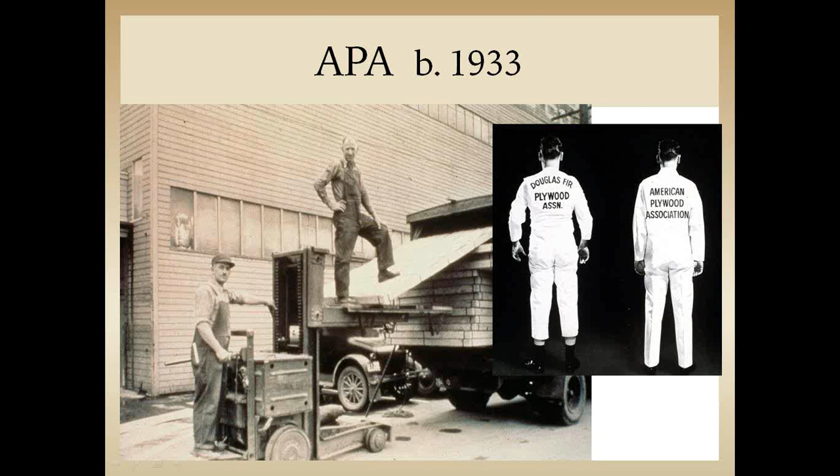The name was changed again in the early 90s to APA, the Engineered Wood Association, to more accurately reflect the new product mix and a new geographic range, both the U.S. and Canada. Products include plywood, oriented strand board, wood I-joist, glulam timber, structural composite lumber, and many associated products.

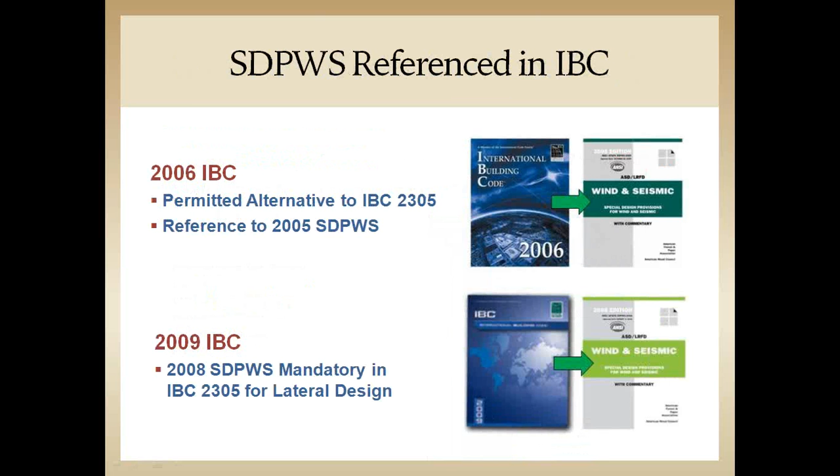The special design provisions was referenced in the 2006 IBC but became mandatory in the 2009 IBC. So some of the changes that were brought about in the 2008 include the ability to design for combined shear and uplift using wood structural panels, provisions for determining capacity of unblocked shear walls, two-sided shear walls. Also, a shear capacity adjustment factor equation was added to the perforated shear wall method, increased strength limit for perforated shear walls, and changes to the high-load diaphragm

accommodation. So, the Wood Frame Construction Manual is another publication by AWC and is a handy reference for both prescriptive and engineering solutions to common design scenarios that are encountered in wood frame construction. Supplemental to the Wood Frame Construction Manual are the guides to wood frame construction in high wind areas. There are separate documents shown here that address wind design requirements in 90, 100, 110, 120, and 130 mile per hour exposure B wind zones. For other wind speeds and exposures, you can simply refer to the 2012 Wood Frame Construction Manual.

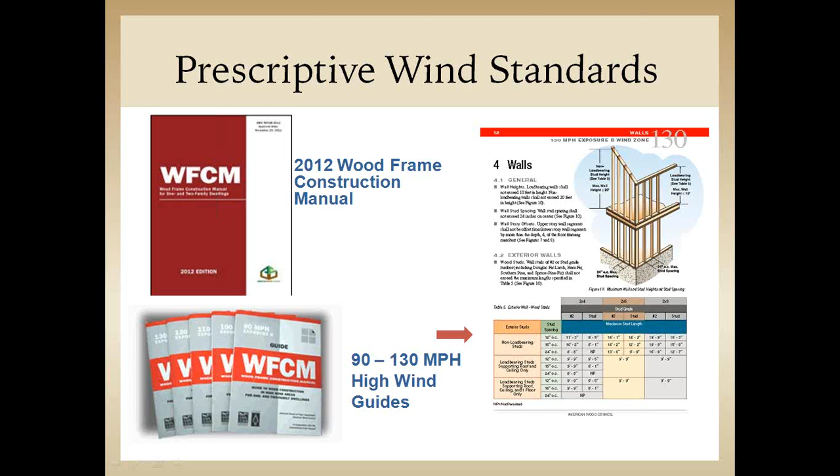But these separate guides are based on the provisions contained in the Wood Frame Construction Manual and are the reference document for high wind wood frame construction in the IRC. Use of the high wind provisions in these guides will result in design solutions that are prescriptively meeting the requirements of the Wood Frame Construction Manual and the IRC.

The prescriptive design of buildings in high wind regions is also addressed in ICC 600, formerly SSTD 10, and it gives a cookbook approach to design of smaller, more simply shaped buildings. An important distinction should be made between prescriptive construction and engineered design, where prescriptive bracing is called for in the International Residential Code with limits to the building size and wind speeds. But these are braced wall panels and not to be confused with shear walls.

Without hold downs, this is the main difference between brace wall panels and shear walls: brace wall panels do not require the use of hold downs. So for prescriptive design, wind speeds over 100 miles an hour, refer to the Wood Frame Construction Manual or the

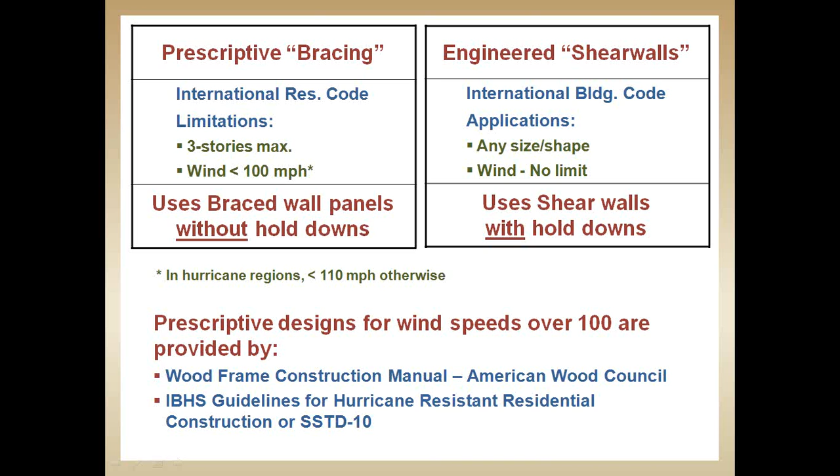ICC 600 document. Many contemporary home designs offer less opportunities for traditional wall bracing due to an abundance of windows and doors, especially in the front and rear elevations.

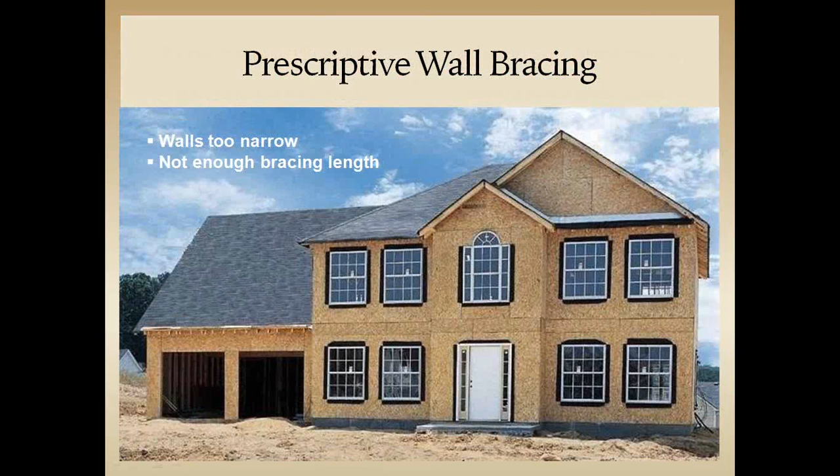In addition to bracing methods given in the residential code, an APA simplified bracing method presented by System Report 102 gives more versatile solutions by offering the ability to use thicker panels at a tighter nailing schedule above the code minimums. What this does is allow for narrower bracing segments to be used. It gives more flexibility in accommodating the greater amounts of openings as found in contemporary home designs. As with all APA publications, SR 102 is free for download at apawood.org.

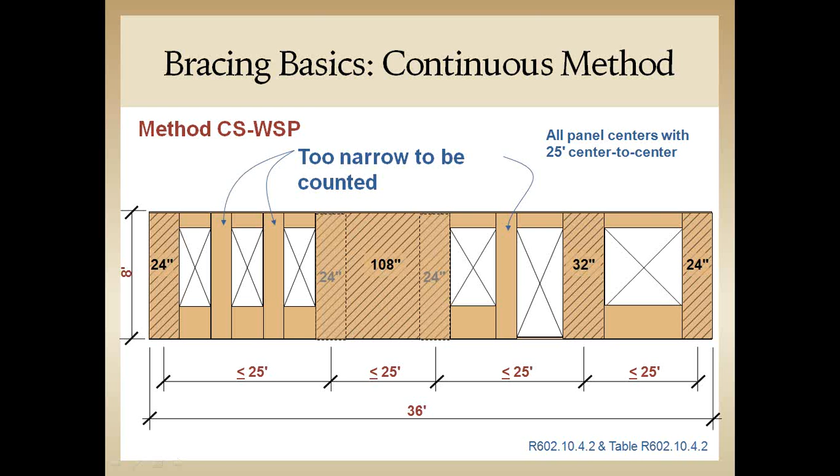The special report SR 102 takes into account an added effectiveness of continuous wall sheathing as represented in the IRC wall bracing method CSWSP, or continuously sheathed wood structural panel, and thereby gives partial credit for walls that are otherwise too narrow to be counted as a bracing unit.

The recent publication by APA, Building for High Wind Resistance in Light-Frame Wood Construction, offers a low-cost system that can be applied to IRC-compliant construction and prescriptively reinforces minimum IRC construction in the weak links that have been identified in some of the high wind events. These have been common in standard wood frame buildings. So it's a 9-point checklist of time-tested details that seek to better provide wind resistance by reinforcing the common vulnerabilities

in prescriptively built homes. Remember that the IRC does not provide a design to resist a specific load, but is a cookbook measure. But by applying these high wind resistant details, at a low cost, as little as $600 on a 2,100 square foot home was estimated as the cost of applying these options to a single-story ranch average size home. It also offers a benchmark for which prescriptive buildings can be constructed to a Code Plus level or above the code minimums, whereby resistance to wind can be dramatically increased for really a small expense. This will be an attractive option for builders who wish to differentiate their homes as safer and more damage resistant than those constructed to code minimums.

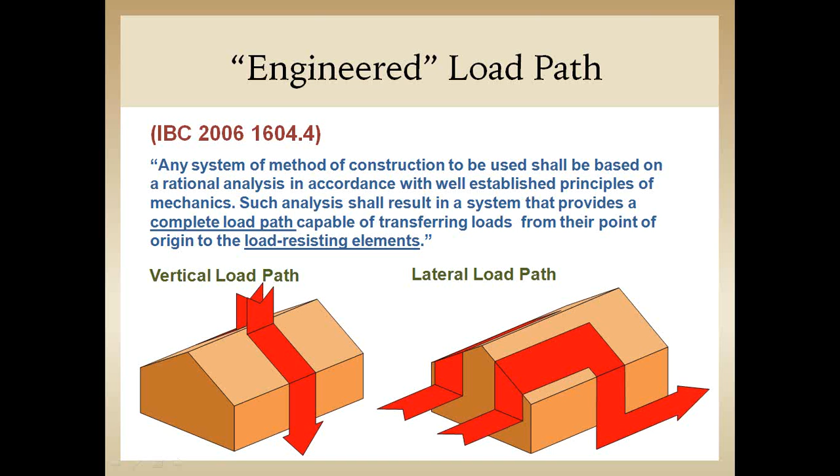In contrast, engineered buildings as defined by the International Building Code must include a rational analysis to provide a complete load path for both vertical and lateral forces. In wood construction, the uplift and lateral load paths are less obvious, so empirical methods, or those based on testing, have been developed to allow a departure from a more rational approach. However, the skin or exterior wall sheathing serves a valuable structural role and provides continuity in the uplift and

lateral load path system. So here wind forces are simply determined by multiplying the wind pressure, both positive and negative, by the area of the building over which the wind pressure acts. Our lateral load systems for resisting the loads include rectangular plates, also known as shear walls, and floor and roof diaphragms that give the structure the ability to resist racking forces and to carry the forces to the foundation and eventually to the ground. Shear walls and diaphragms are simply constructed of framing members sheathed with wood structural panels with enough nails so that the parallel framing represented by the wall and roof assemblies remain rectangular.

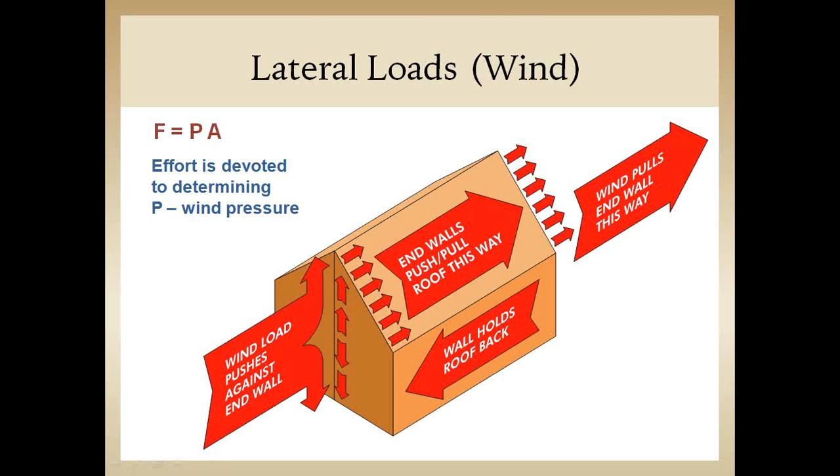Another important aspect to building performance is that the walls and roof elements are connected together and to the foundation adequately so that they do not become separated from each other or the foundation in an extreme load event. Resistance to both positive and negative pressure is required for adequate building performance. Negative pressure may result in uplift as it applies to this roof. Positive pressure exerted on the windward wall here may also be exerted on the interior of the building should a breach in the building envelope occur in the area of positive pressure.

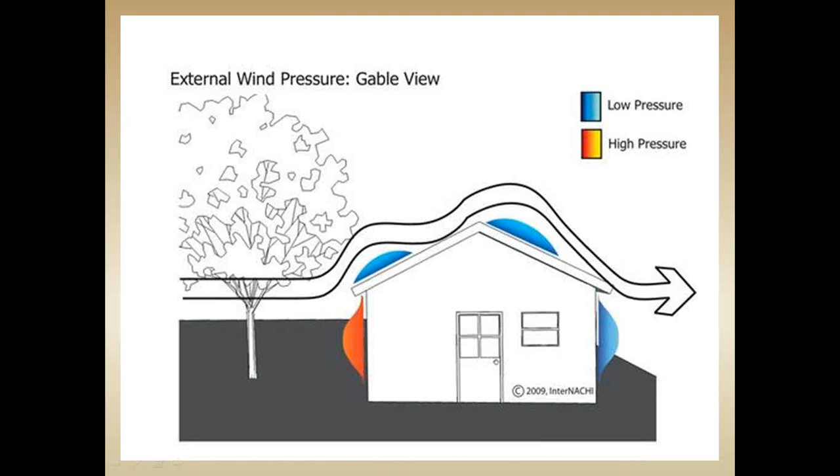This is often due to flying debris and loss of windows and doors from flying debris and wind pressure. And when a breach occurs, the interior of the building can suddenly become pressurized, adding to the uplift and lateral forces already being exerted on the exterior surface of the building.

Seismic or earthquake forces are exerted on the building due to acceleration of the ground. However, the building doesn't know a lot of difference, as far as it's the same assembly that resists the seismic force as does the wind. The difference is that the force is generated from the ground acceleration, whereby the building is left to catch up with the foundation movement, accelerating and decelerating in 3 directions simultaneously. Lateral and uplift forces are determined by the product of the building mass times the ground acceleration. So the greater the mass of a building, the greater the lateral force for a given seismic acceleration.

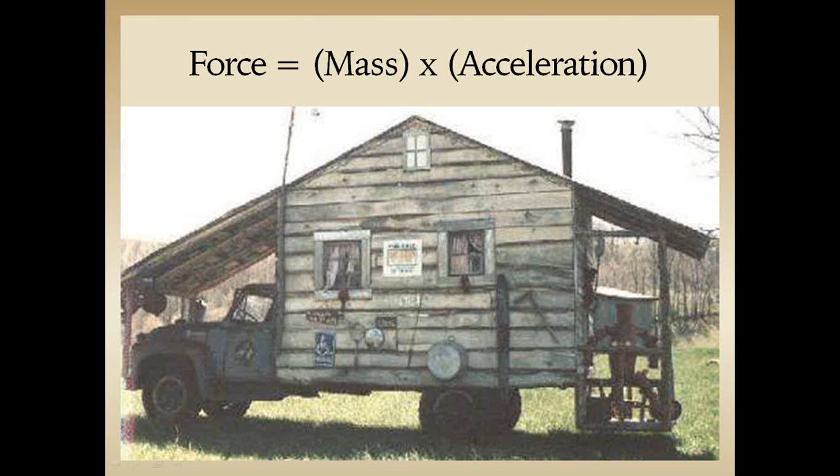Wood buildings are light and flexible, resulting in lower seismic forces to be resisted. Remember that the force is equal to the mass times the acceleration. So lower mass equals a lower force. And the redundancy in the system, which uses thousands of nailed connections within a building such as this, results in good performance because of the energy absorbing qualities and the stiffness in resisting the elements. So both energy dissipation, reduced lateral force and redundancy allow the wood systems common in North America to perform well if properly constructed.

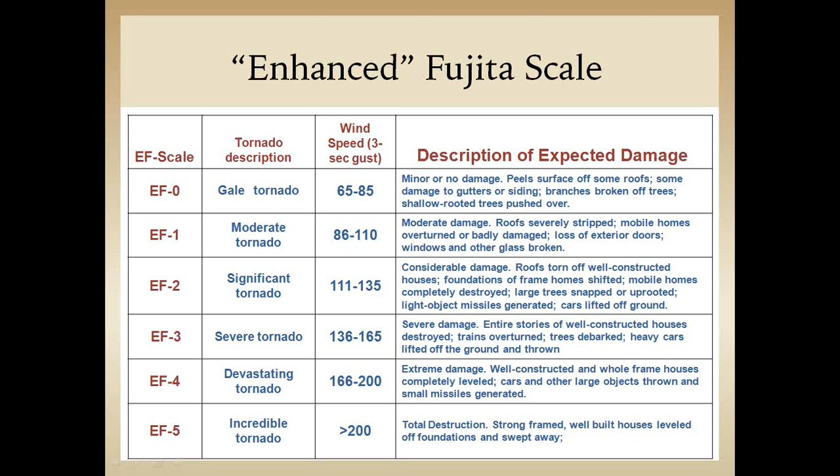This would be true if all tornadoes were rated EF5, or the 300 mile per hour plus variety. Here we see the Enhanced Fujita scale indicating a wide range of wind speeds associated with tornadoes, EF0 through EF5. Generally, these tornadoes are classified based on descriptions of the damage. So, you know, it's a judgment call many times by the observer as to which rating a tornado might be given.

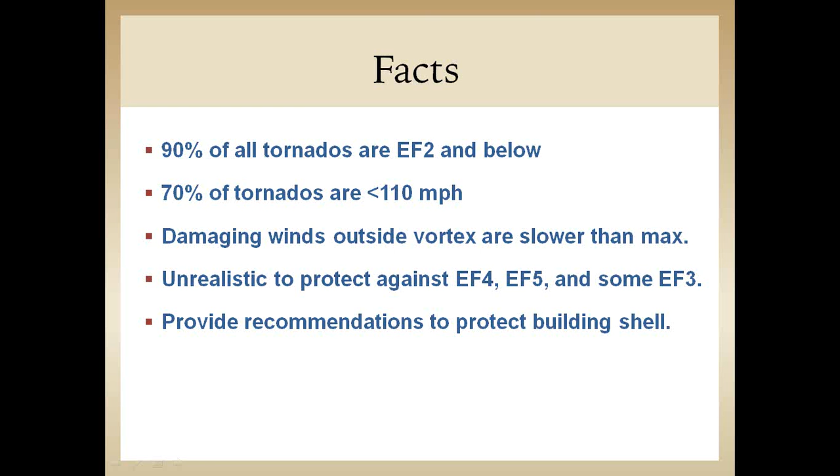So there are a few facts here that we should recognize: 90% of all tornadoes are EF2 and below. 70% are less than 110 miles per hour. And the damaging winds in a given tornado outside the vortex are many times slower than the maximum rating of the tornado. It's unrealistic to protect against EF3, 4, and 5 tornadoes, but we can provide recommendations to protect the building shell in the lower rated wind speeds, including almost 95% of all tornadoes.

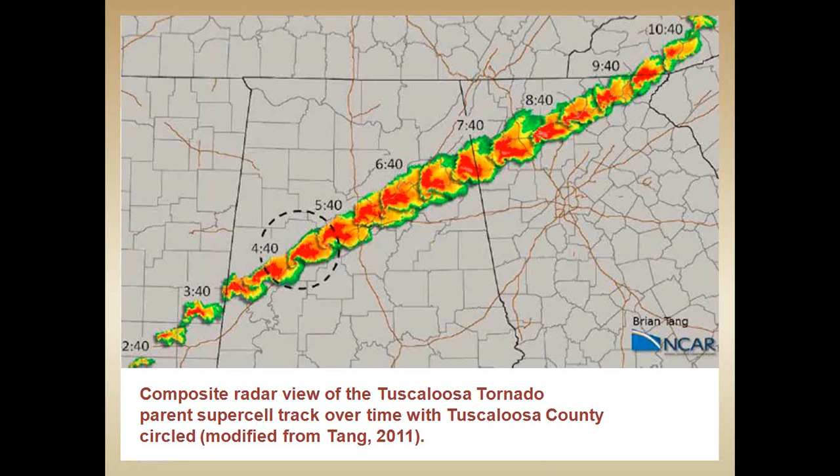This image reflects a variation in wind speed along the path of the tornado affecting Tuscaloosa, Alabama in the super outbreak of 2011. A team of engineers and scientists closely observed damage within the circled area of the tornado path as it traveled close to the University of Alabama. And you can see within the circled study area, a detailed study indicated a variation in intensity from EF0 through EF4 within this area. As you can see, within the damage area, more of the area can be attributed to the lighter EF0 and EF1 winds than the more extreme events located sporadically along the vortex.

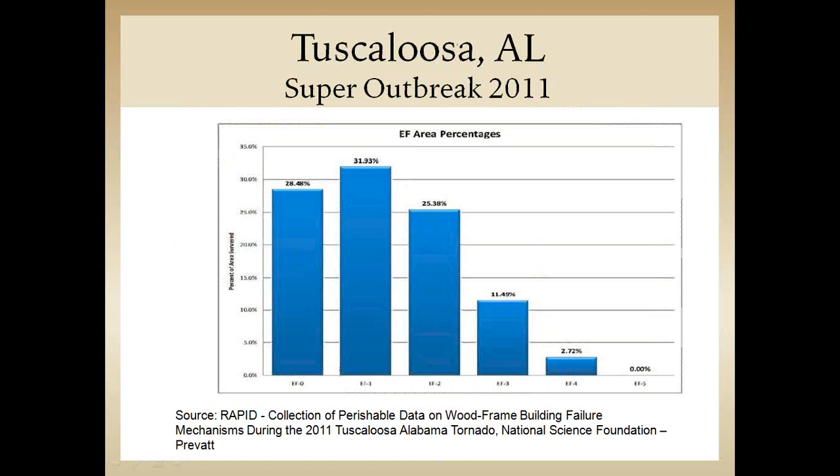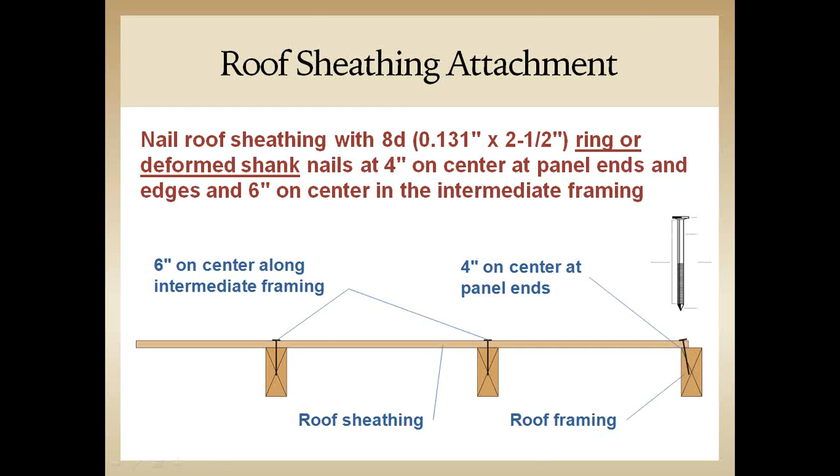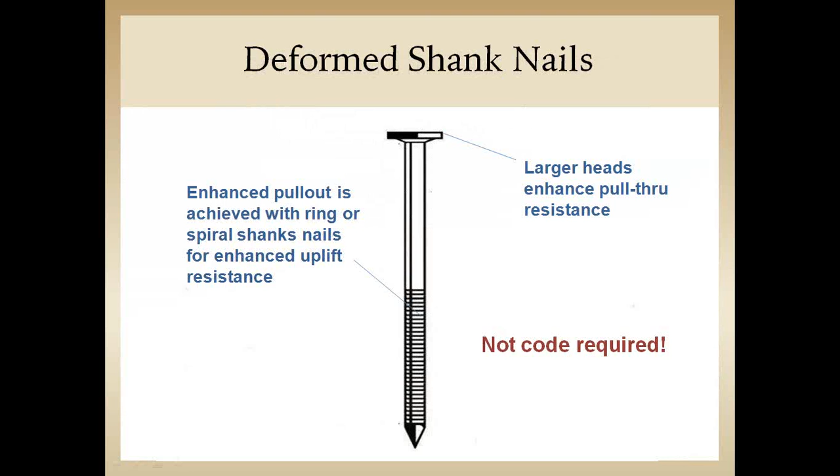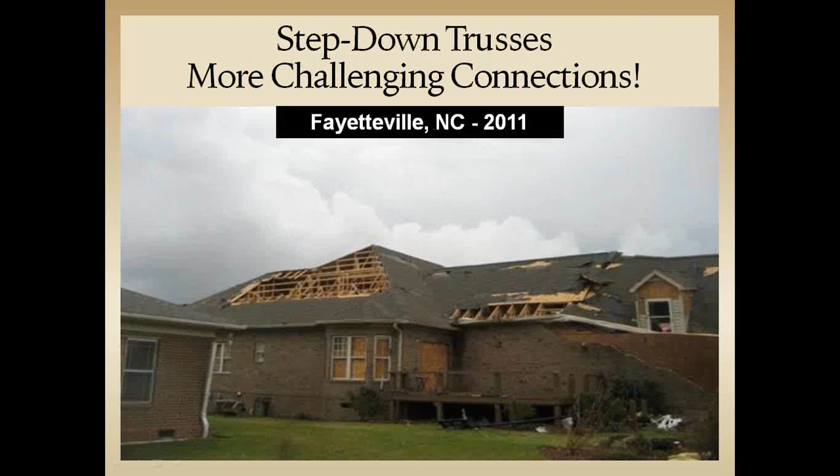Another real-world challenge is when step-down trusses are used in hip roofs. In this case, the roof sheathing is sloped, but the nailing surface of the truss top chord is not. This invites poor connection between the two. A better detail for framing this area is to use purlins on top of the step-down hip trusses so that the nailing surface is flush with the roof sheathing, and the direction of the roof sheathing does not need to change.

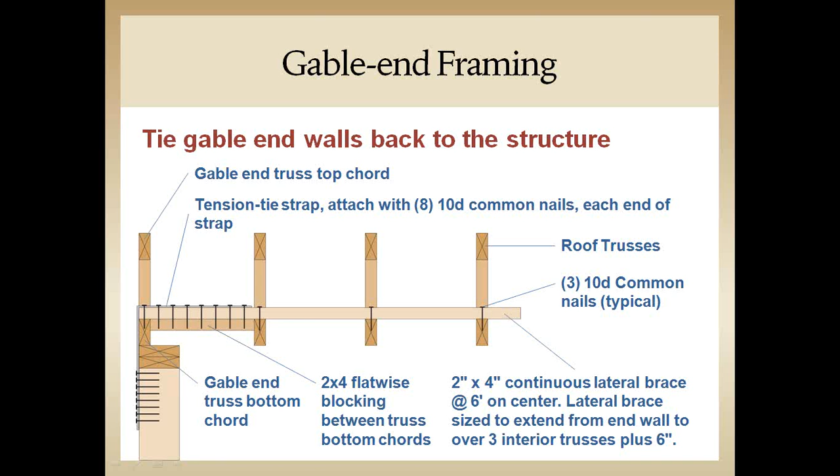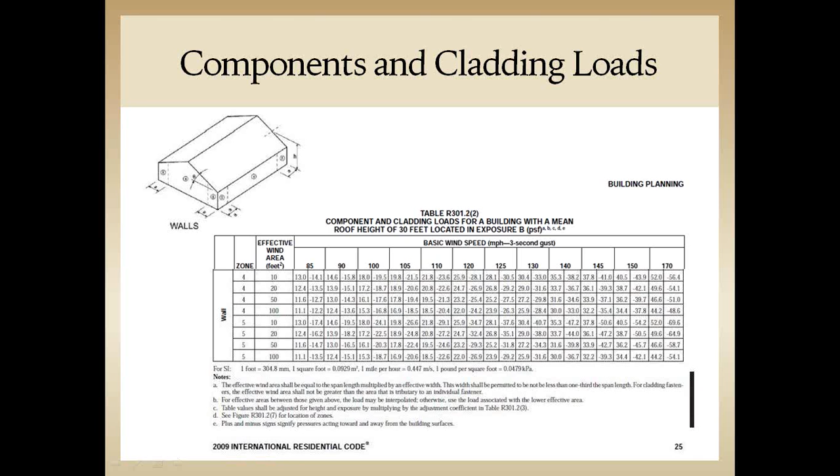strong tornado, EF3 approximately. Pressure requirements for wind acting on the exterior surface of a building are specified in the International Residential Code. These are localized pressures referred to as component and cladding loads that are meant to be resisted by the siding and wall sheathing in the home's exterior. These minimum pressure requirements apply to all residential buildings constructed according to the IRC. Specific component and cladding loads can be accommodated using APA's TT 105 Technical Topics Report, Requirements for Wall Coverings and Wind Pressure, available for download at the website.

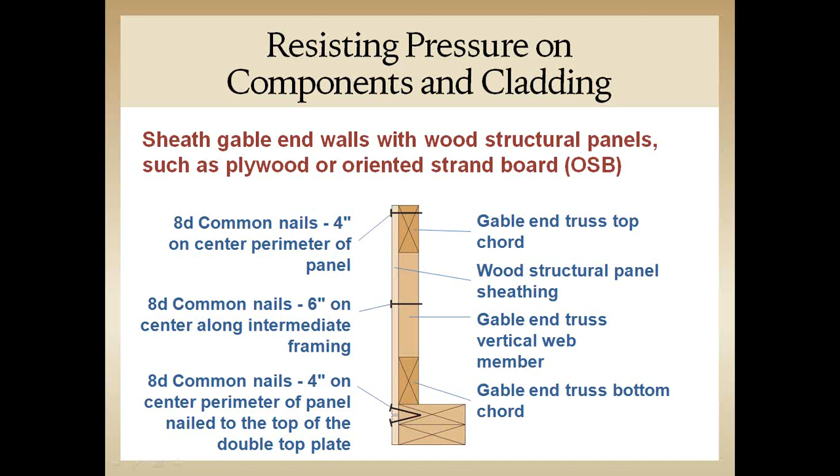Table 1 from this publication gives specific nailing required to resist the component and cladding loads in the IRC, but a more general approach represented in the high wind guide will be to use more nails for attachment of wall sheathing than is required by the code. This is especially important along the gable ends where no interior gypsum is present on the inside face of the wall to assist in resisting the wall pressure.

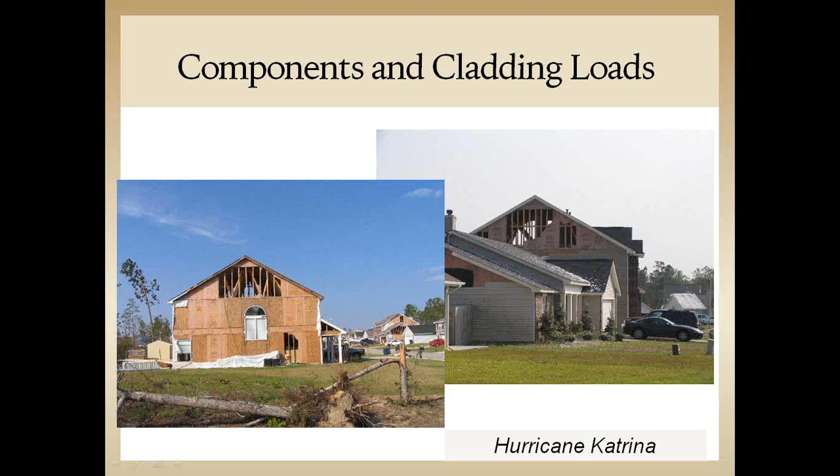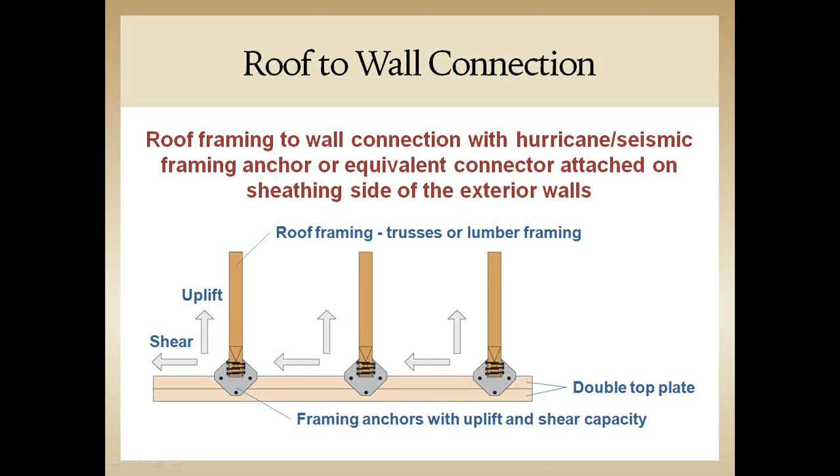Another useful piece of hardware are structural screws that can be added to enhance the roof-to-wall connection. These can be combined with metal connectors in cases where the connectors don't offer enough capacity, or used alone as an enhancement over code minimum toenailing.

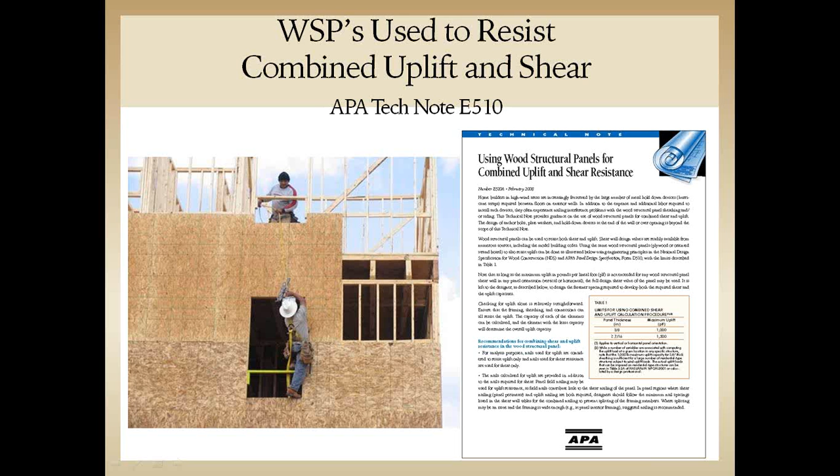As represented in APA Tech Note E510, this method for handling uplift loads across structural discontinuity is a very efficient method and can reduce cost and construction time as compared to the use of metal connectors across joints in the wall framing, such as you see here.

Many wall sheathing manufacturers are now making oversized panels, and these are longer than the standard 8-foot panels, still 4 feet wide, intended for wall applications where the panels extend from the sill plate to the upper level band joist. These are manufactured intentionally for 8, 9, and 10-foot walls, typically eliminating mid-height blocking, allowing easy inspection of the continuity of the load path. Studies of this taller wall sheathing indicate that less air infiltration results and a more direct uplift lateral load path is obviously a benefit here.

Of course, when there's only a small segment of wall between two openings, the use of metal connectors will still sometimes be needed. There may not be enough wall between the two openings to accommodate. There are two methods for using wood structural panels to provide uplift resistance.

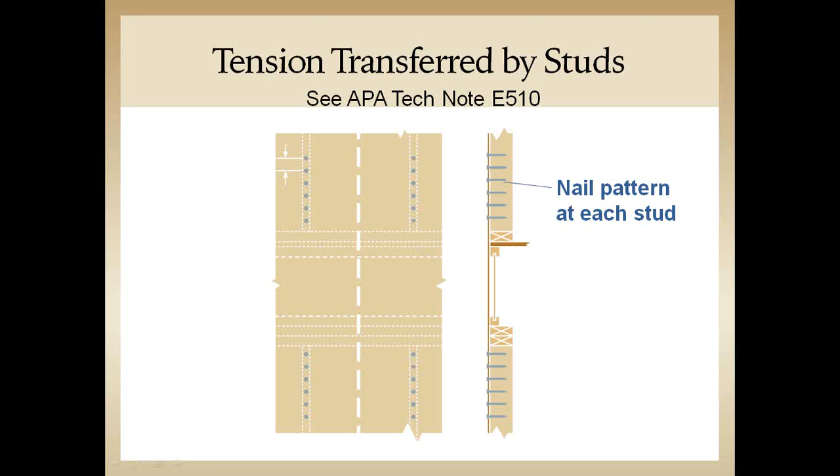The first involves the uplift tension being transferred by the studs where the horizontal joints are located away from the discontinuities of the framing. In this case, additional nails can be placed in the studs to accommodate the uplift at this location. This is usually easy to accomplish since additional nails can fit easily along the intermediate framing members, where most fastening schedules for shear wall attachment require only 12-inch on center fasteners at the interior or at the intermediate wall framing members.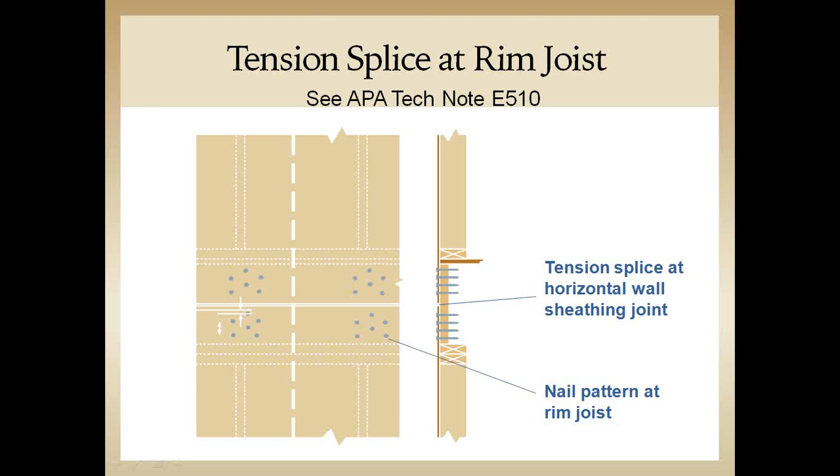The other method outlined in APA E510 allows the splice to occur at the rim board, where uplift fasteners are placed in the rim board at the splice. Of course, this requires that the rim board be designed for vertical force, which is perpendicular to the rim board length. It's not possible with rim board using lumber or other products without design capacities in the vertical or short dimension. However, APA plywood and OSB rim board, such as these used in conjunction with I-joist floor systems, are acceptable for this application due to their significant strength that's available perpendicular to the member length.

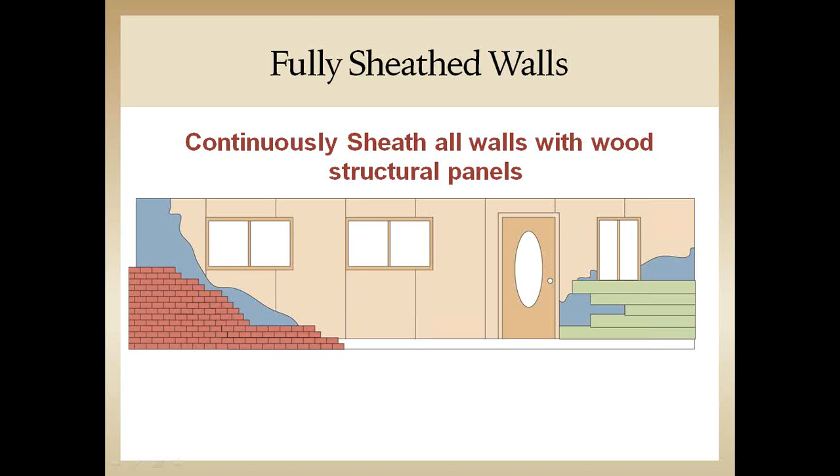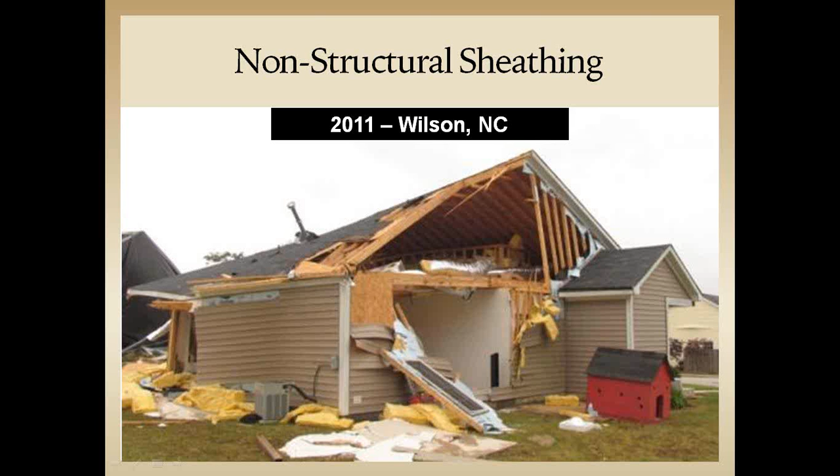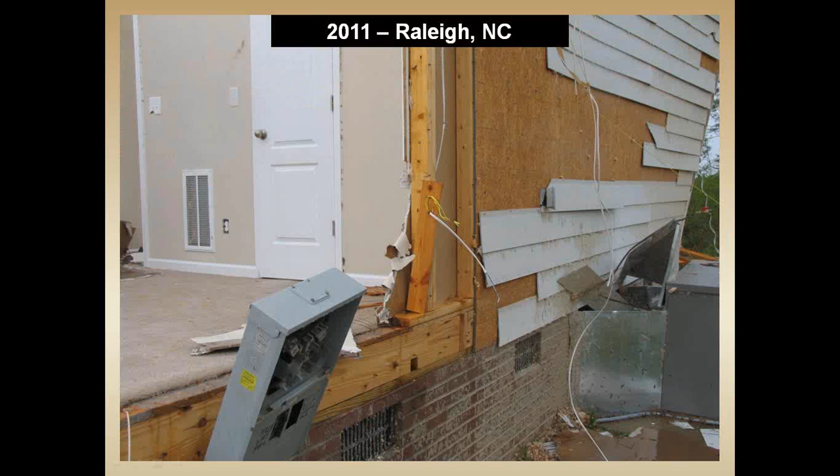Another important detail in the APA High Wind Guide shows the wall sheathing overlapped with the bottom plate or foundation sill plate, allowing direct nailed attachment to the foundation anchorage. In this example from Raleigh, North Carolina, all of the essential elements are in place, but the load path is not continuous due to poor nailing at the bottom of the exterior wall sheathing in the region of the foundation. We can see from this vantage point that the wall sheathing nails at the bottom were mainly located along the rim board instead of the sill plate, and there are too few nails.

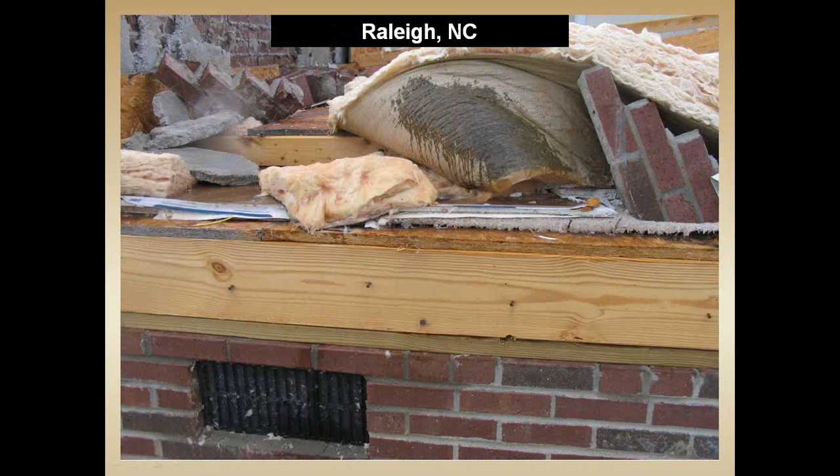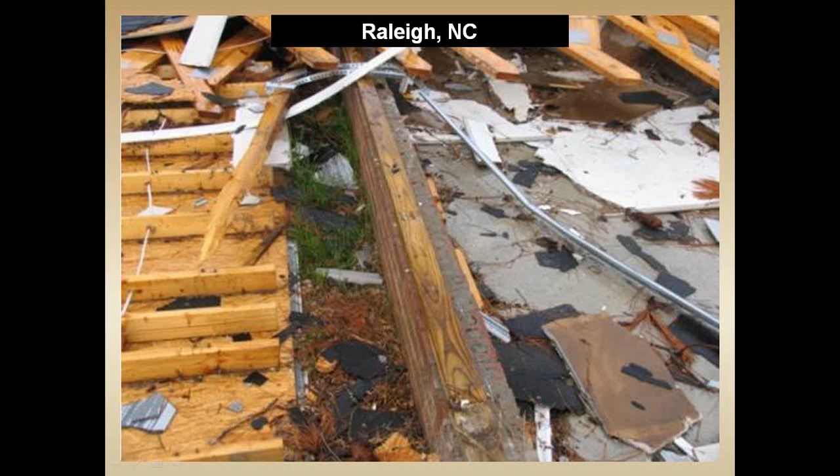Due to relatively large uplift forces at this location, APA recommends larger plate washers spaced 48 inches on center at this location as an upgrade to code minimum requirements in the IRC. Larger 3x3 plate washers, relatively inexpensive, are much more effective at holding down the bottom plate as compared to minimally sized round washers typical in this installation. Slotted plate washers are a common piece of hardware in seismic areas where they're required in high seismic prescriptive construction.

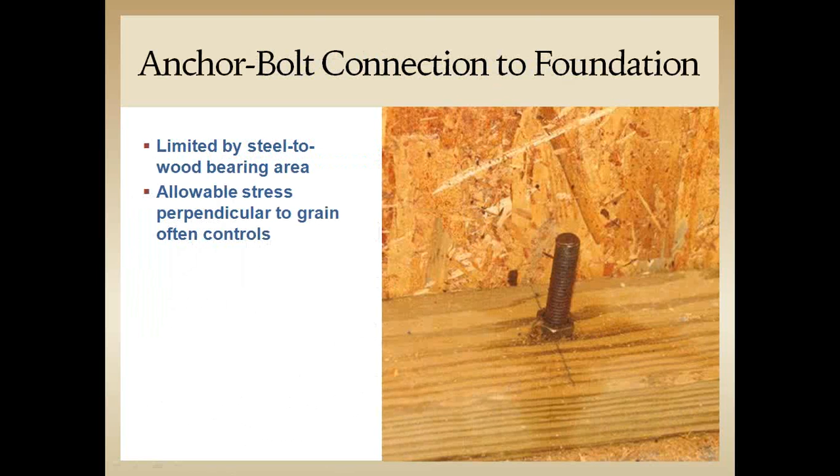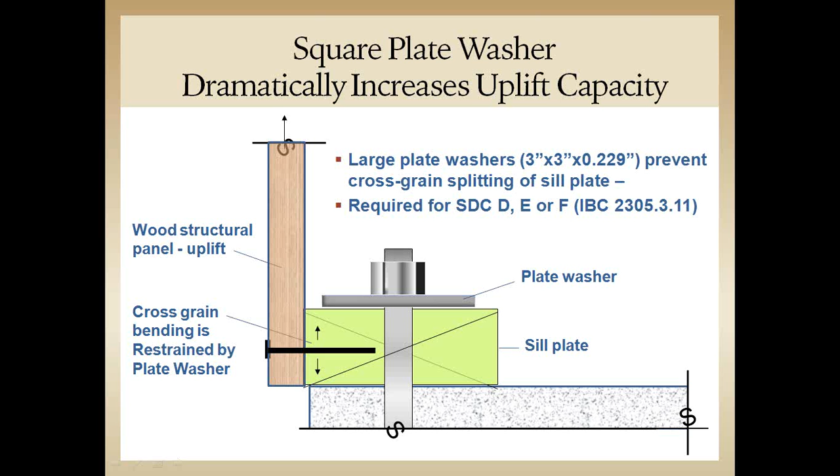In this image, we see that the larger plate washer increases the bearing area of the anchor bolt, but also, since the washer incorporates nails from the bottom of the wall sheathing, cross-grain bending in the bottom plate material, which is a potential failure mode, is also reduced. Testing in APA labs using larger plate washers at the bottom of walls subjected to uplift and shear simultaneously confirms this assertion.

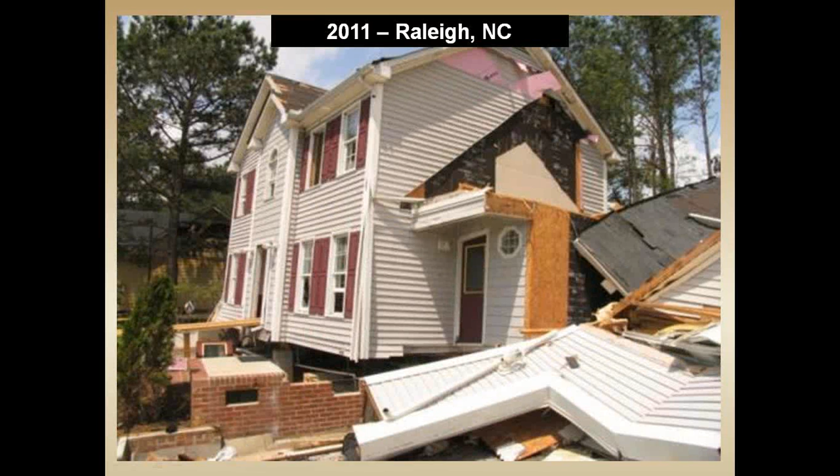This home was damaged in the May 2011 tornado due to poor foundation anchorage. And note the vegetation around the home, relatively intact, an indication that the wind forces were relatively light in this wind event. Despite the moderate winds, the home has shifted approximately 6 feet from the original location, and the garage is totally collapsed. Closer observation revealed no anchor bolts, and the sill plates in this case were poorly attached to the foundation, using steel pins that were easily pulled out of the foundation material.

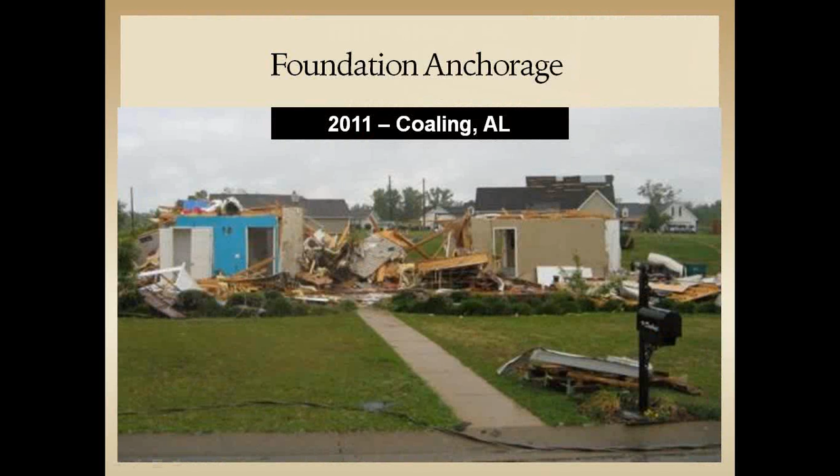Similar conditions were observed in newly constructed homes in harder hit areas of Alabama, as in this case, where exterior walls are largely absent from this home, constructed atop a slab-on-grade foundation. We can see that the bottom plate's absent from the perimeter of the slab, adjacent to the glued-down hardwood flooring. But upon closer examination, we see that an attempt was made to nail the plates to the perimeter of the slab, and the head of this fastener pulled through the bottom plate. In other cases, the nails were observed to be bent below the bottom plate and did not penetrate the concrete foundation.

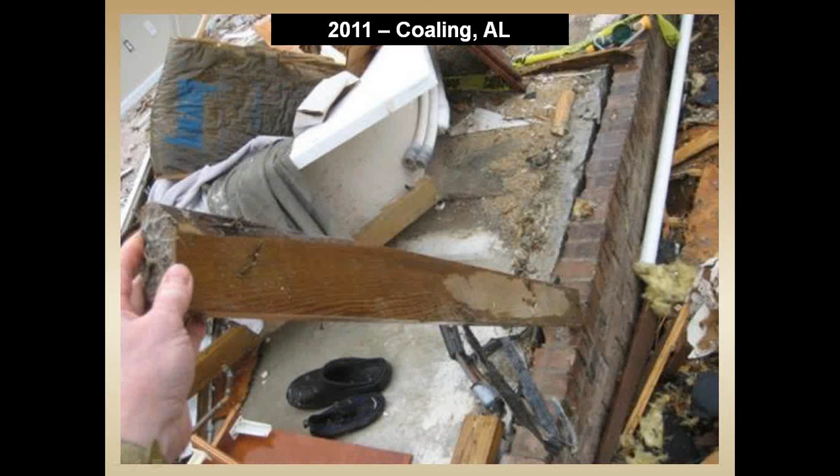This photo shows the result, taken in the same neighborhood, and shows a completely stripped home, all of the framing removed from the foundation by the wind. APA System Report SR101 gives more detailed information and design guidance for walls subjected to combined uplift and shear.

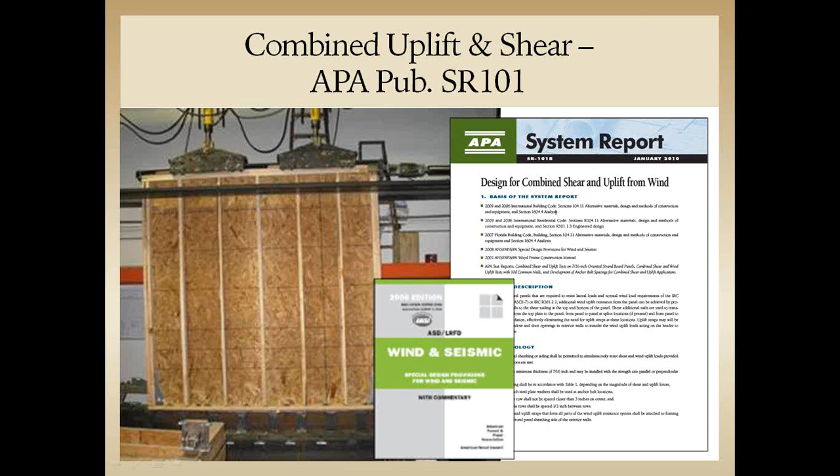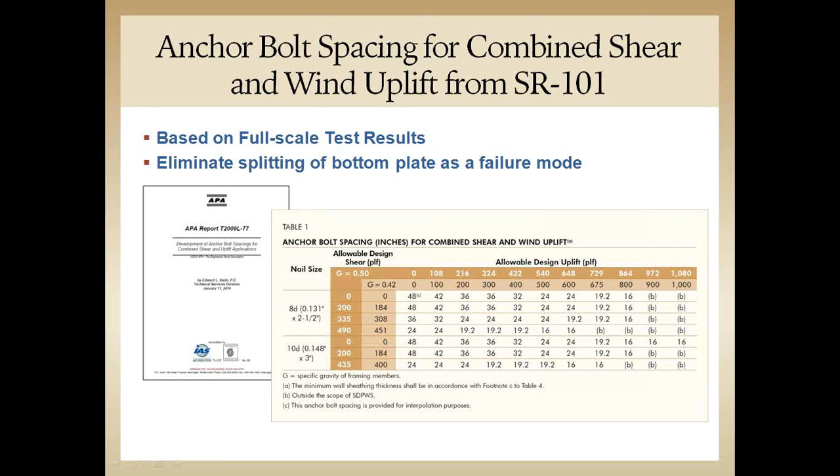This apparatus in the APA lab confirmed the values that are recommended for the spacing of foundation anchor bolts, as well as the methodology for using wall sheathing to resist simultaneous shear and uplift forces. The methodology is also reflected in the American Wood Council's special design provisions for wind and seismic. APA full-scale testing of uplift at the bottom plate connection confirmed these connections eliminate cross-grain bending or splitting of the bottom plate, as well as confirming the allowable uplift capacities given in Table 1 of SR101. This test report is available for your review at apawood.org.

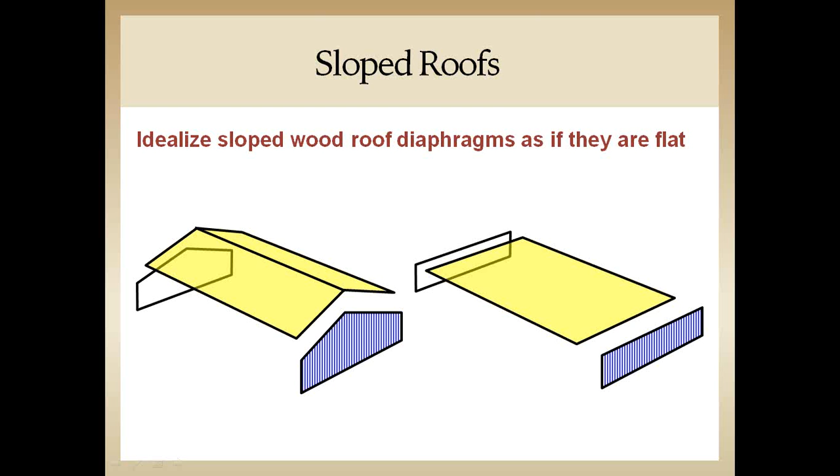This type of analysis resembles that of a simple span beam, where the beam would be located from top to bottom, simply spanning between the resisting walls. The bottom of this deep beam is subjected to tension forces just like a normal beam, which is normally resolved by tension splices in the top plate of the leeward wall. Shear within this beam analogy is assumed to be carried in the web and is designed through selection of adequate fastening in the roof sheathing to the framing to resist these racking forces. In the case of sloped roofs, the designer can conservatively assume that the roof is flat for analysis purposes. Analyzing it as a flat roof, even if it is sloped, will result in a conservative design.

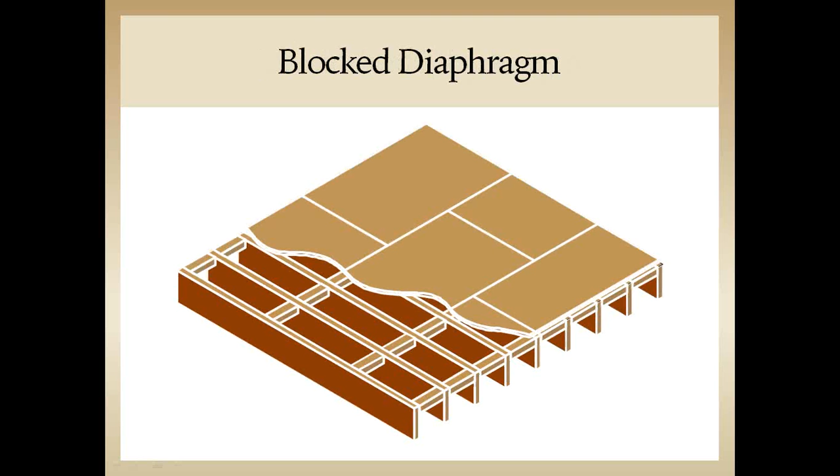Shear walls are normally assumed to be blocked, but the 2008 special design provisions for wind and seismic for the first time gives designers an adjustment factor for use in unblocked shear walls. This pertains to shear capacity adjustments for walls up to 16 feet in height based on cyclic testing of assemblies with as small as a 2-to-1 aspect ratio. Designers have two choices for horizontal diaphragm analysis, the flexible or rigid. The designer will normally have either method from which to choose, and depending on the building configuration, these two idealized assumptions offer differing but adequate results.

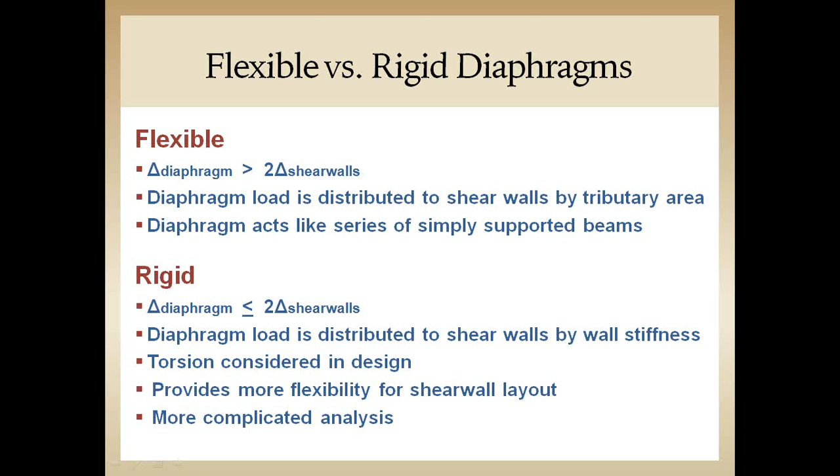So for flexible diaphragms, it's considered a scenario where the deflection of the diaphragm is greater than twice that of the shear walls. In this case, the load is distributed to the shear walls by a tributary area. The diaphragm acts like a series of simply supported beams. With the rigid analysis, where the deflection of the diaphragm is less than twice that of the shear wall, the diaphragm load is distributed to the shear walls by the wall stiffness, where a torsion can be incorporated in the design. This gives more flexibility for shear wall layout in many cases, but it offers a more complicated analysis.

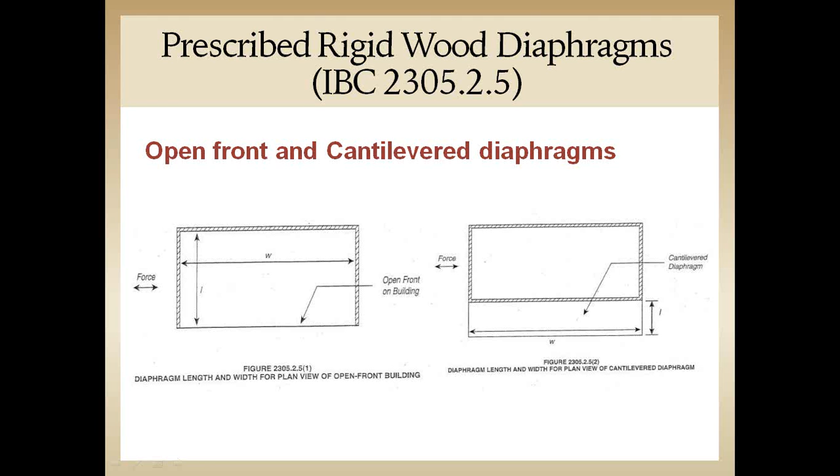The only case where the code is clear on which method should be used is where there's cantilever diaphragms or open-ended buildings, where rigid analysis is required to take into account the eccentricity between the load and resistance to load. So let's look at some examples. Let's assume this is our building layout with two exterior resisting walls, one interior.

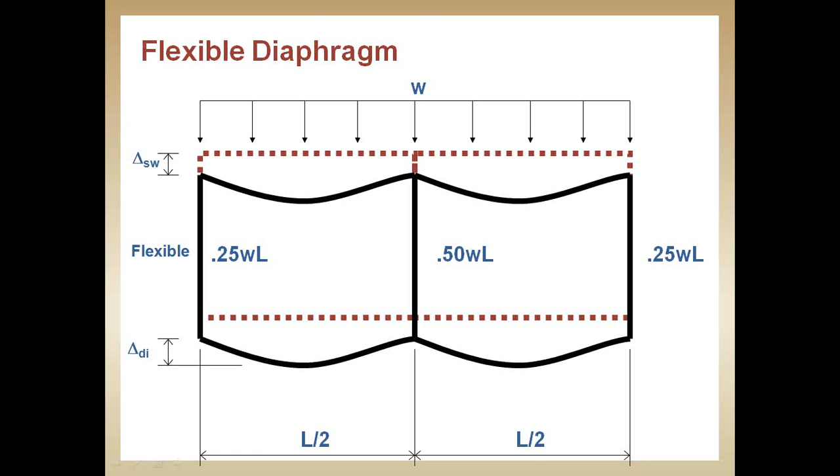With a flexible analysis, the load is distributed according to the tributary area, and so the distribution is half the load to the middle wall and a quarter of the load to the exterior walls, compared to a rigid analysis where the load is distributed according to the stiffness of the resisting elements or shear walls. And so in this case, all the walls have the same stiffness and carry a third of the load.

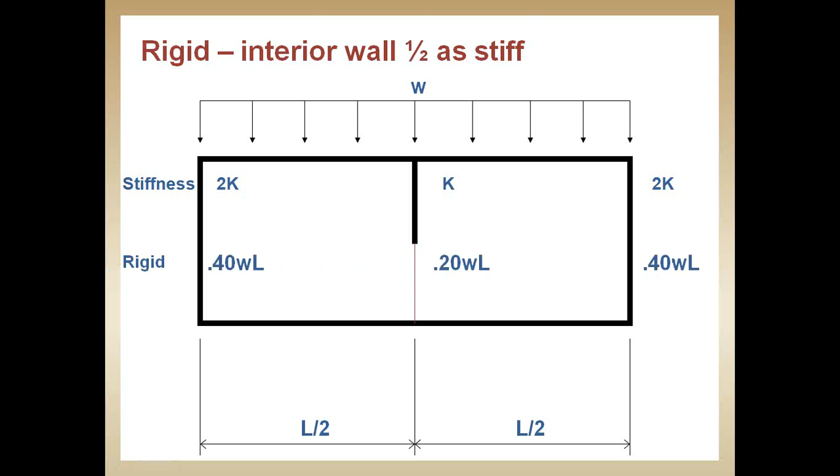Changing that up slightly, reducing the stiffness of the interior wall, this case results in the interior wall being half as stiff, so it receives only 20% of the load, and 40% of the load goes to the exterior walls. So in comparing the two methods, we see that with the flexible analysis, even with the short wall in the interior portion, we would end up with 50% of our load in this location. And with the rigid analysis, only 20%. This may be more compatible with our building design.

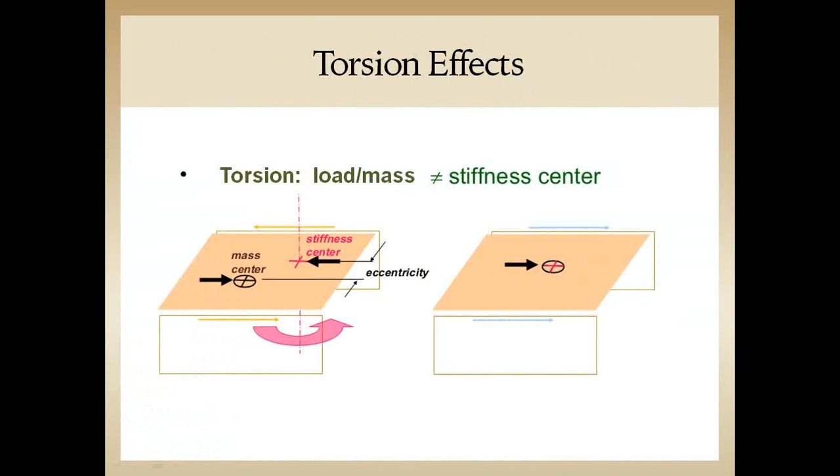So it's up to the designer, again, to use whichever analysis method is more appropriate, but the only time where it's mandated is for cantilevered diaphragms in open-ended buildings. But rigid analysis allows the designer to take into account the torsion resulting from an eccentricity that exists between the load and the resistance to the load. In this case, the torsion is resolved by distributing additional load to the perimeter shear walls.

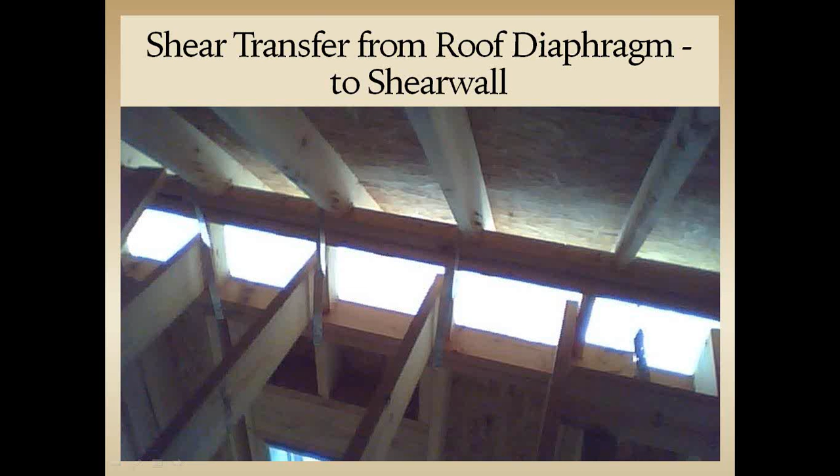A challenge that is encountered is the transfer of the roof diaphragm loads to the top of the resisting shear walls. In this case, an interruption in the load path is often encountered where racking of the framing members in this area may represent a disconnect in shear transfer from the roof to the walls. So some type of blocking or X-bridging would be needed in this area to resolve the discontinuity.

The 2012 IRC weighs in on this subject by requiring blocking to be placed between the framing when the distance from the roof sheathing and the top of the wall exceeds 9.25 inches. This shows the roof sheathing and blocking installed to eliminate the overturning failure of the roof and the ceiling framing in this area.

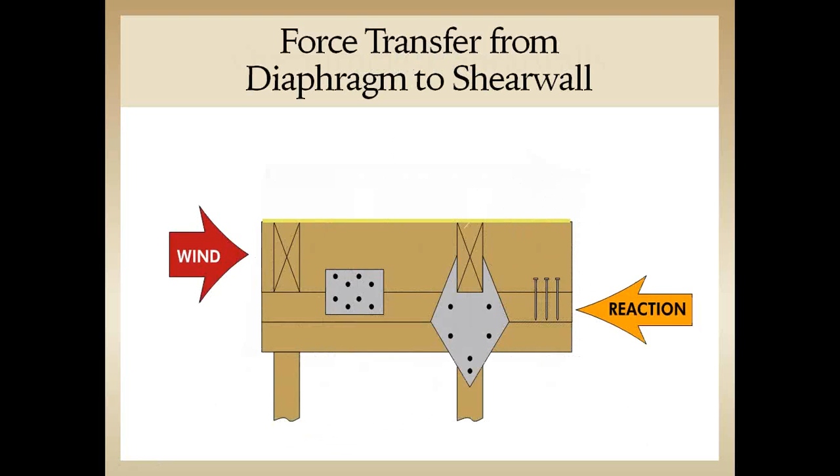Anchor bolts are ineffective for providing hold-down forces, since the distribution of load along the base of the wall in this case will result in an unzipping of the wall sheathing from the bottom plate. The hold-down anchor, in comparison, results in an equal distribution of force to the fasteners along the vertical stud element.

Hold-down anchors such as this one are intended for seismic forces, where, in seismic events, the rounding of the base of the traditional hold-down connector can lead to excessive deformation. The pre-deformed base on this connector eliminates this problem, as do the screwed connections shown here, a tighter connection with less slip, which is important in the seismic performance of buildings.

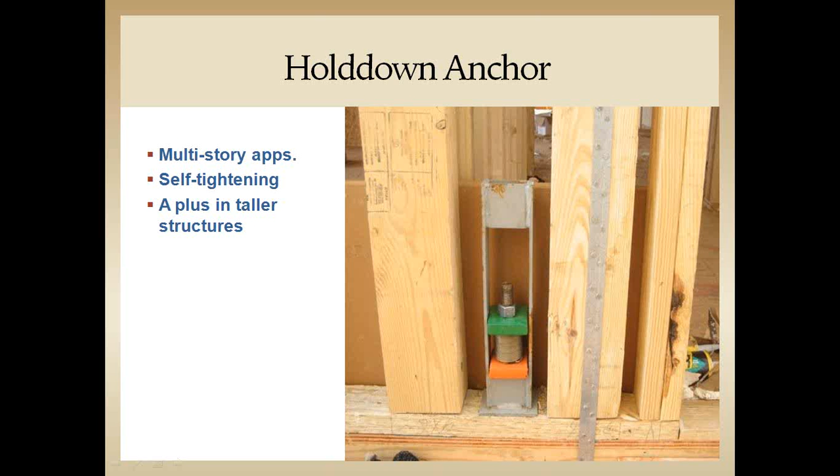This photo shows a hold-down connector commonly used in multi-story applications, where shrinkage in the framing after construction can lead to slackness in the overturning resistance of the connection. So a self-tightening mechanism shown here alleviates this problem. It's often encountered in taller wood frame buildings. From there, the force is transferred by a continuously threaded rod with couplers to the foundation.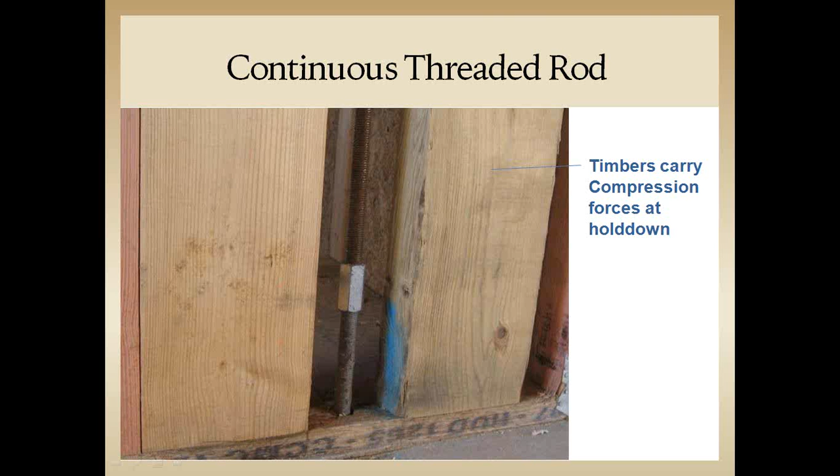Also shown are large timbers adjacent to the hold-down, often used instead of multiple studs to accommodate overturning compression forces, which can be significant at this location. Also seen here is a structural composite lumber bottom plate, which offers higher compression stresses available perpendicular to the bottom plate. The building code allows the designer to use up to 60% of the design dead load to resist overturning of the shear walls due to wind and seismic forces. The remainder of the force must be resisted by the overturning connectors.

Shear wall capacity is affected by numerous properties, including the specific stud species, the APA wood structural panel grade and thickness. Thicker panels result in higher shear wall capacities up to 5/8 inch thick. Thicker panels from there do not improve performance, as the capacities are limited by the individual fastener, really just limited by the fastener performance at this point.

Also, specific nail size and spacing affects the capacity. More nails at the perimeter of the wall sheathing gives more capacity. Additional nails along intermediate framing members do not affect the capacity in any significant way.

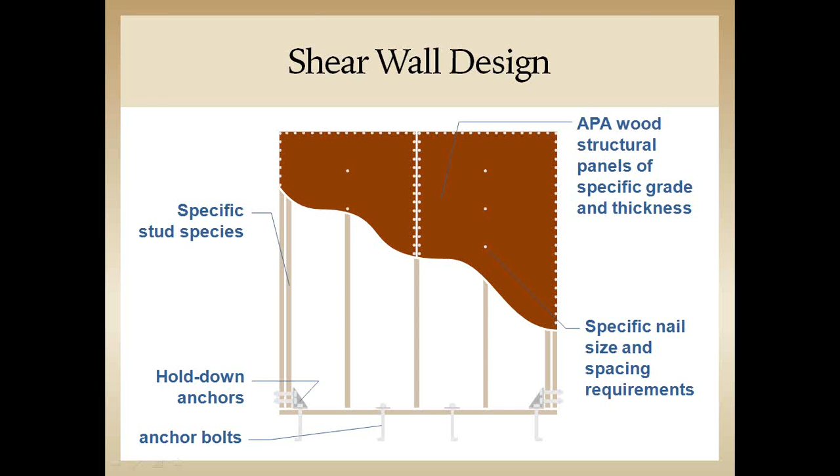A caution here is for designers in the eastern U.S. to stay away from the Structural 1 grades, which are primarily available for design of high seismically loaded diaphragms on the West Coast. Stay with the common rated sheathing product values instead of the Structural 1 grades, which primarily are available in high seismic areas.

For design of walls to resist loads, the maximum aspect ratio for a shear wall is limited to 3.5 to 1 for wind and 2.5 or 2 to 1 for seismic. The aspect ratio is simply the height to width ratio. An exception is made for seismic design where 3.5 to 1 ratios can be used with a penalty determined by the multiplication of 2 times the width over the height.

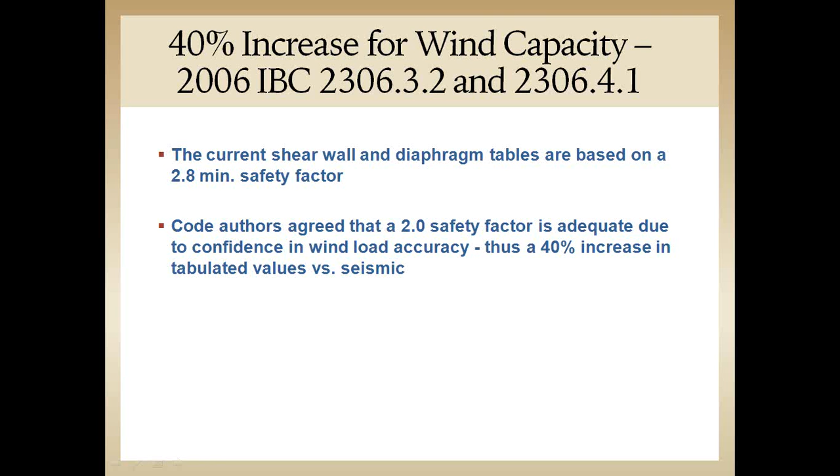Starting with the 2006 IBC, a 40% increase was allowed in the shear wall and diaphragm tables for wind resistance. The code authors agreed that the 2.0 factor of safety was appropriate for wind resistance due to a higher degree of certainty with regard to the loads as compared to seismic. Also for wind design, adding capacities of dissimilar materials is allowed. Designers may now add the capacity of gypsum sheathing on the interior side of the shear walls for wind resistance only. So a comparison of wind and seismic analysis shows a disparity in capacities for the same wall due to these factors.

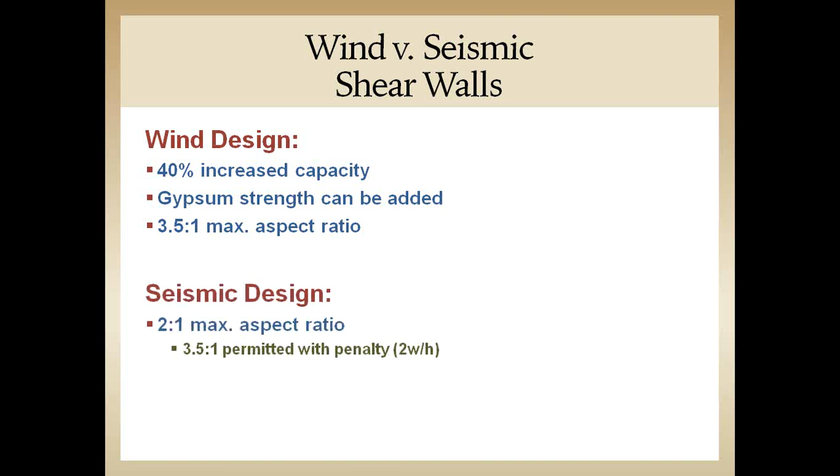That is, wind has a 40% increase for design of the tabulated values, the gypsum strength can be added, and a larger aspect ratio is permitted. If we perform an analysis of this arrangement, we have a 3.5 to 1 aspect ratio with a 3 and 12 nail spacing, 8D nails with gypsum on the opposite face of a 7/16 structural panel wall sheathing.

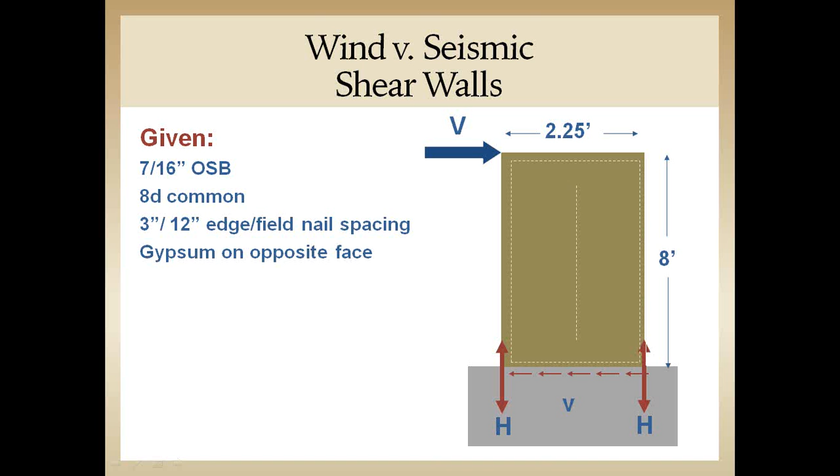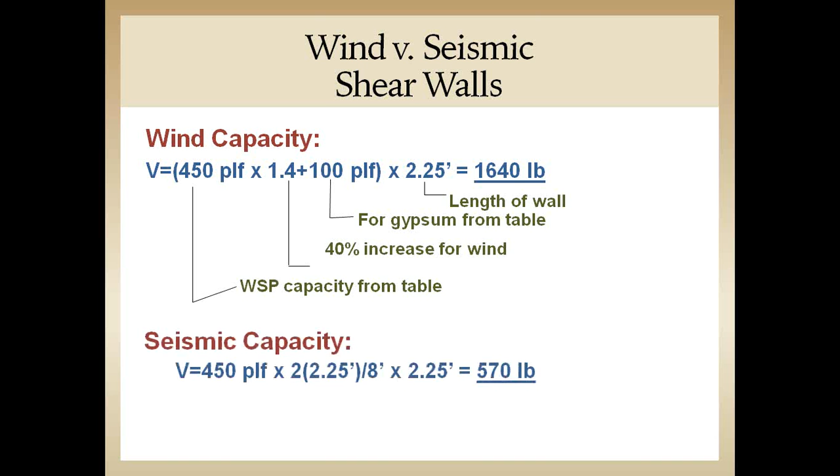So to determine the wind resistance of this assembly, we take the tabulated value 450 times 1.4 for the 40% increase. The gypsum capacity of 100 pounds per linear foot is added for a total of 1,640 pounds total for this 2.25 foot length wall. For seismic, we have no increase to the tabulated value, no gypsum capacity added. We actually take a reduction since it's not a 2 to 1 aspect ratio. This results in a number of much less capacity, only 570 pounds for seismic resistance of the same wall. How about using adhesives?

Well, adhesives can improve shear wall strength. It's theoretically possible, although you would need to use a rigid adhesive, which is not appropriate for field applications where variability and quality control is difficult to achieve a known adhesive capacity. So it's not advisable to combine an adhesive with nails to increase the stiffness or strength of a shear wall. With the adhesive connection being stiffer than the nailed connection, the adhesive must fail before the nails can receive the load. This is not allowed practice, especially in high seismic zones, where the practice can lead to catastrophic and sudden failures.

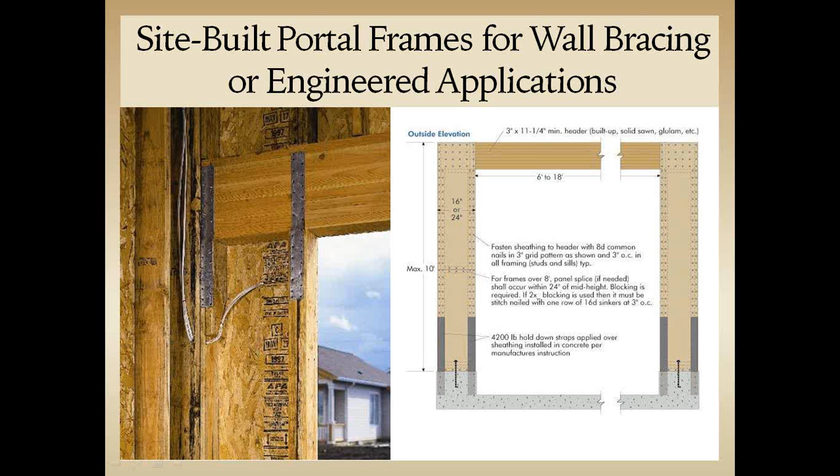Site-built portal frames are an option when shear wall aspect ratios or minimum bracing widths in prescriptive construction are not met. Here, extra lateral resistance is offered by a moment connection at the base of the narrow walls, and moment resistance is also achieved through a lapping of the wall sheathing at the top of the wall with the extended header, which extends to the outer limits of the narrow wall segment. Design of portal frames for engineered applications is outlined in APA report TT100.

A similar method is used for prescriptively designed wall bracing. That's the portal frame without hold downs. This is referred to as a bracing method, CSPF, continuously sheathed portal frame, in the IRC, and is similar to the engineered portal frame except without hold downs at the base. For more information on the narrow wall bracing method shown here, you can refer to the IRC or APA publication J740. So there are 3 primary methods for shear wall design available to the designer: the segmented, force transfer method, and the perforated method.

Traditional segmented approach assumes that openings in the wall due to windows and doors is an interruption in the system, and so the shear wall is limited only to full height segments adjacent to the openings. In this case, hold downs would be necessary on each end of each shear wall segment.

The force transfer method is simply an exercise in statics using free body diagrams of separate rectangles making up the wall system. Then the mechanical connections, such as the metal straps shown here, are used to transfer forces between the rectangular elements. Probably the most designer-friendly method for shear wall design where multiple openings are present is the perforated method that accounts for openings in the wall system based on testing.

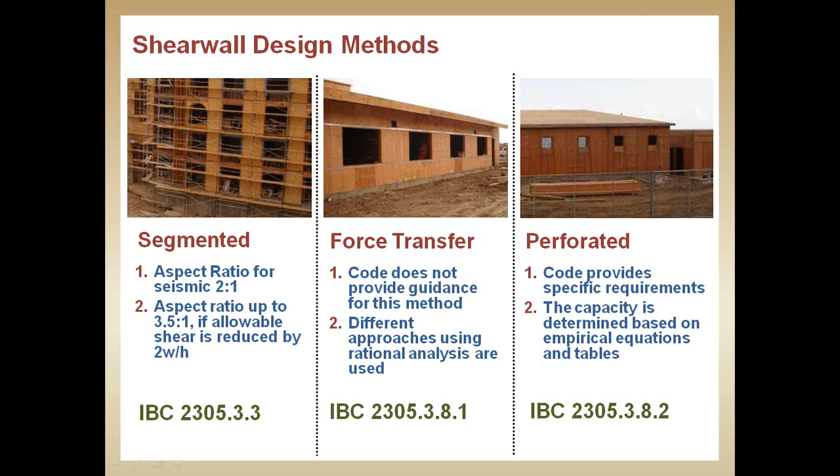Advantages for this method are that it's simple and hold downs are only needed at each end of each shear wall line. Reductions in strength of an otherwise uninterrupted shear wall are accounted for by a shear capacity adjustment factor. It should be recognized that reducing hold down anchorage generally has an effect of reducing cost on a given building design, as compared to the traditional segmented approach to shear wall design. The force transfer method and the perforated methods generally give more economical solutions by reducing the number of hold downs.

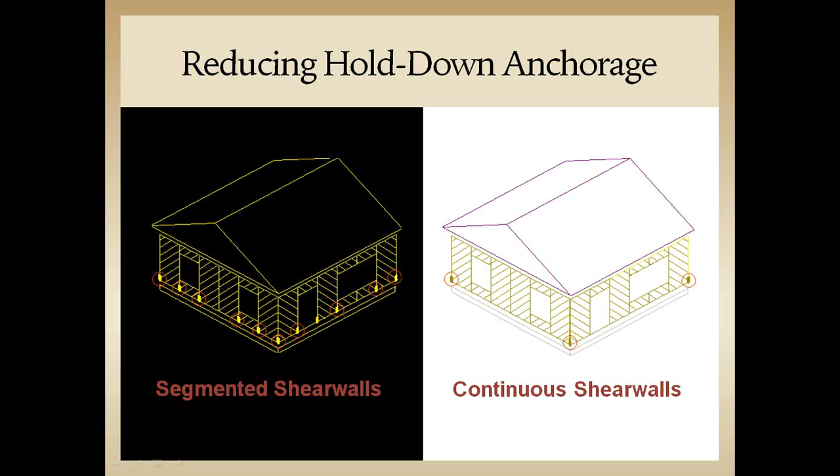So let's take a look at these three systems individually, starting with the traditional segmented approach. In this case, only the full height segments are considered to be part of the shear wall system. Shear is distributed to these full height segments based on their length, with each segment being designed to resist the overturning forces independently. As mentioned previously, this may result in an abundance of hold-down anchors in wall systems with numerous openings using the traditional segmented approach.

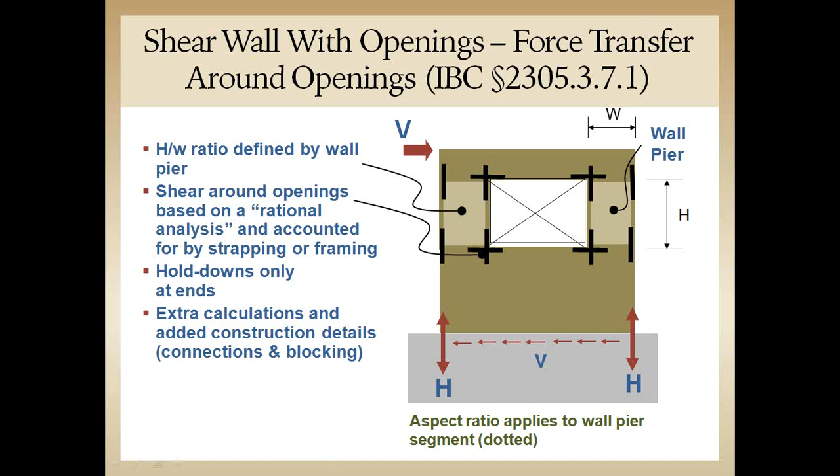The main advantage to the force transfer method is that the height-to-width ratio is determined by the wall pier, or the light-colored segment adjacent to the openings in this figure. And so it can result in a much narrower segment adjacent to the openings, since the height-to-width ratio only applies to the wall pier. Again, the shear around the openings is based on a rational analysis accounted for by strapping and framing. Hold downs are only required at the ends, but this is more of a calculation or design-intensive method with added construction details for the connections.

The shear wall perforated method makes the assumption that the shear wall includes partial height segments, and a reduction is taken in the overall shear capacity through the use of a shear capacity adjustment factor, which is determined based on the height of the openings and the percentage of the wall that contains full height sheathing, meeting the governing height-to-width ratios. In this method, hold downs are only required at the ends of the shear wall line, and so a reduction in the number of shear wall hold downs is likely.

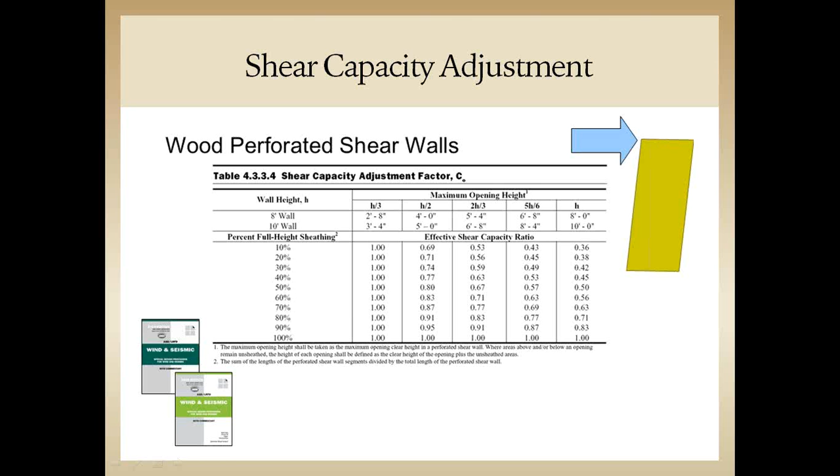With the 2008 special design provisions for wind and seismic, this method, formerly limited to 490 pounds per linear foot, has been expanded to include higher limits, 980 for seismic and 1370 pounds per linear foot for wind. The shear capacity adjustment factor generally is determined using this table from the special design provisions for wind and seismic, where the percent of full height wall sheathing and the maximum height of the opening is cross-referenced to give a reduction factor to be applied to the base value of the wall capacity, as if it had no opening.

More recently, an equation has been added to more precisely estimate the shear capacity adjustment factor. The equation takes into account the actual area of openings in the wall as compared to the table that assumes all openings are the same size as the maximum opening size. And this allows for more precise and efficient designs using the perforated shear wall method.

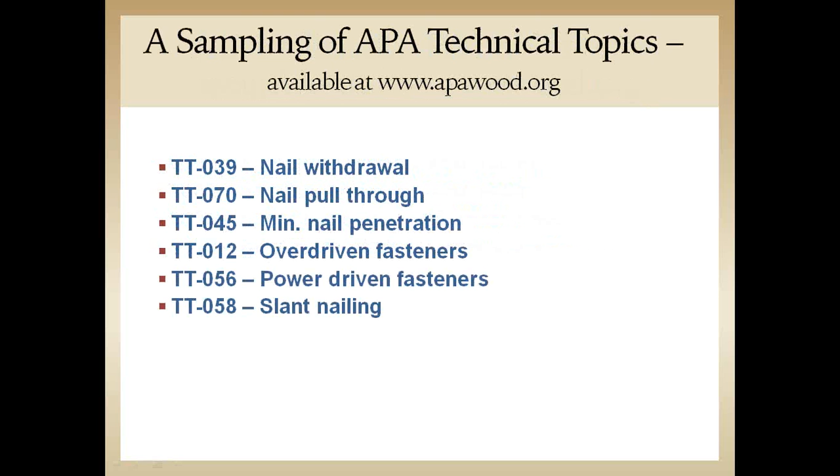A few of the publications that will assist in your design include the APA diaphragm and shear wall literature, which gives numerous design examples, APA's SR102 simplified wall bracing method for prescriptive construction, and APA's Building for High Wind Resistance, also intended for prescriptive construction, all available for free download at the website apawood.org. A sampling of additional resources of interest may include the Engineered Wood Construction Guide, E30, Roof Fastening for Wind Uplift, Shear Transfer at Engineered Wood Floors, and Roof Retrofitting for High Wind Uplift. Also, these technical topics on issues such as fastener performance are also available for free download.